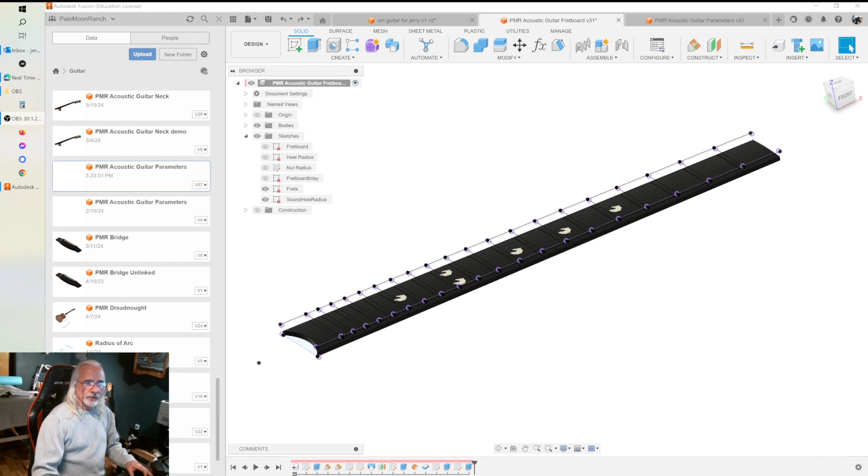So a small problem has been pointed out to me in my fretboard model, where we talk about cutting in our frets with this sketch we created up above. And what I said is that when we do this extrude, we want to do the extent type to object, and that we want that object to be the face of this fretboard.

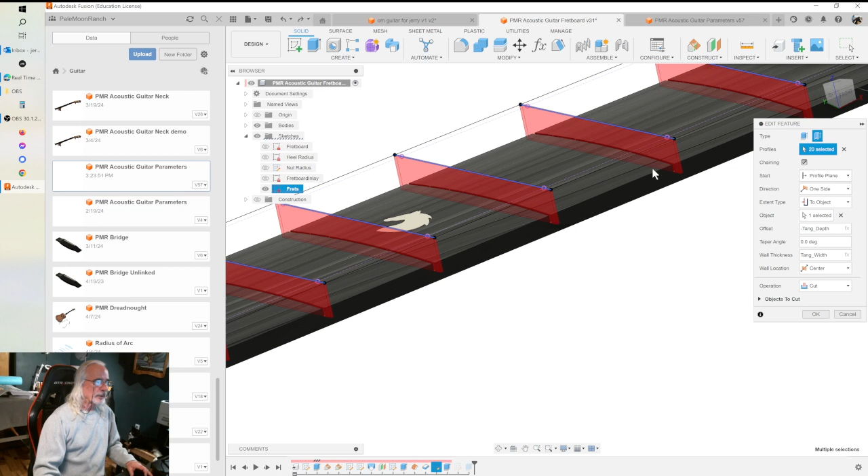Unfortunately, what I forgot about when I recorded the video was, forgive me, I created the model 2 years ago, and I'm just now documenting it. And I forgot that that method only works if you're using hidden tangs. If you try to select the face with these lines extending past the width of the fretboard and then try to extrude that down to get that curved bottom, you get an error like this.

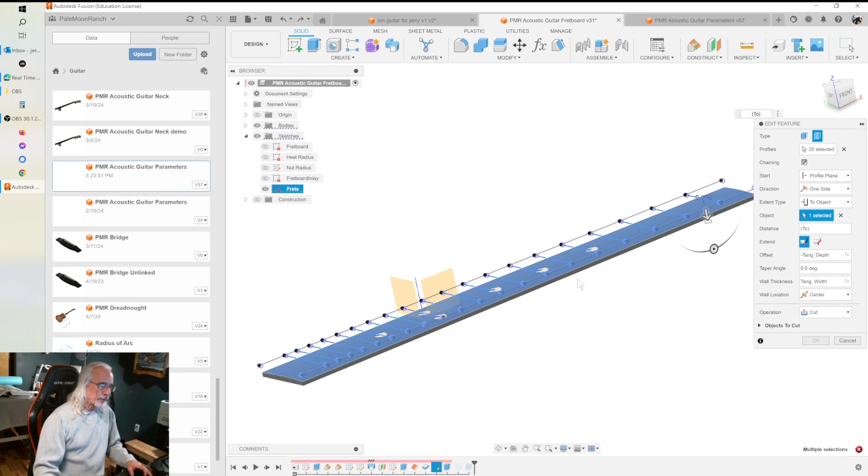So I select that face and I get this: cannot complete extrusion because the extrusion profile falls outside the boundary of the selected body. Unfortunately, I don't know any way around that. So what you have to do instead is, first off, if you don't absolutely care about that curved bottom in the fretboard, instead of selecting this face as the object, you need to select the point on the end of the fretboard right here, like this.

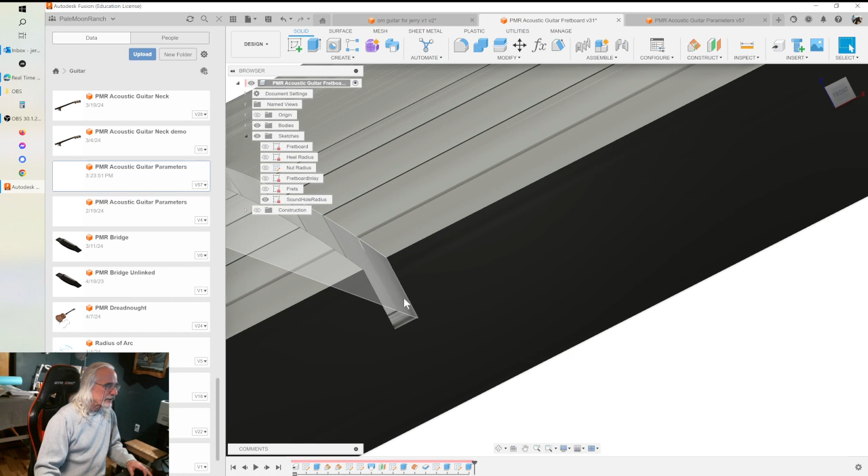So select this point, and then it'll work, but it'll give you a flat bottom. If we say OK, we look inside here and we can see that it's flat on the bottom. And of course, if you're just modeling this for aesthetics, that's not a big deal. We're going to lay our fret in here in a future video, which I haven't recorded yet. I'm going to show you how I make the frets, and they'll sit in here and it'll look nice and pretty. It'll close up the end nice, but there will be a hollow underneath that fret.

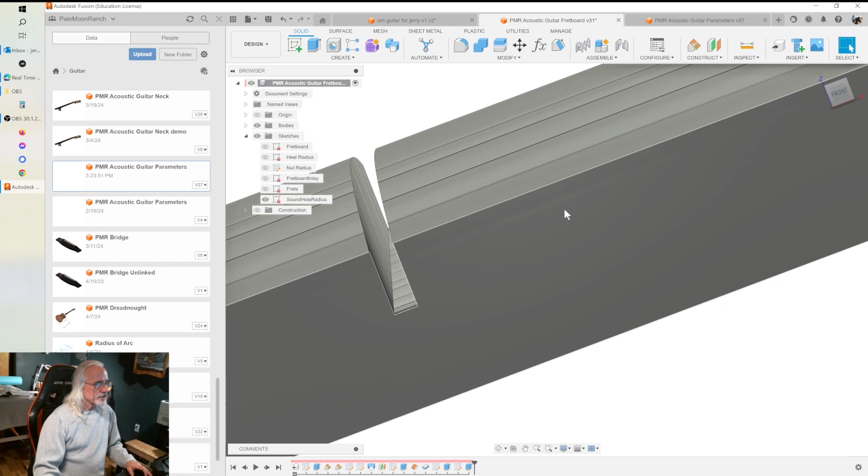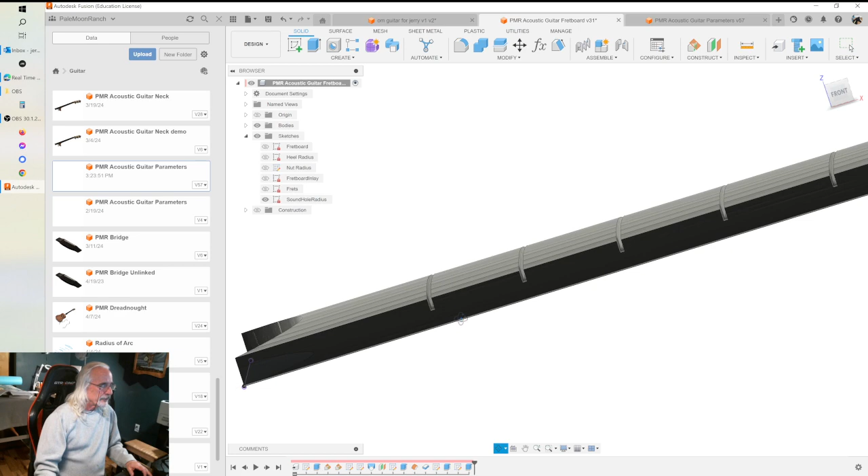If you're going to use this model to actually cut your fretboard, then you need that curved bottom, because you want that fret to sit down on there. You want to be able to put a little CA glue, or however you do it, down in there and glue that fret and press it down on that CA glue. So with that said, if that's what you need, I do have a workaround. It isn't pretty, but I'm going to give it to you, and you can use it or not. It is the only way at this point that I have of doing it.

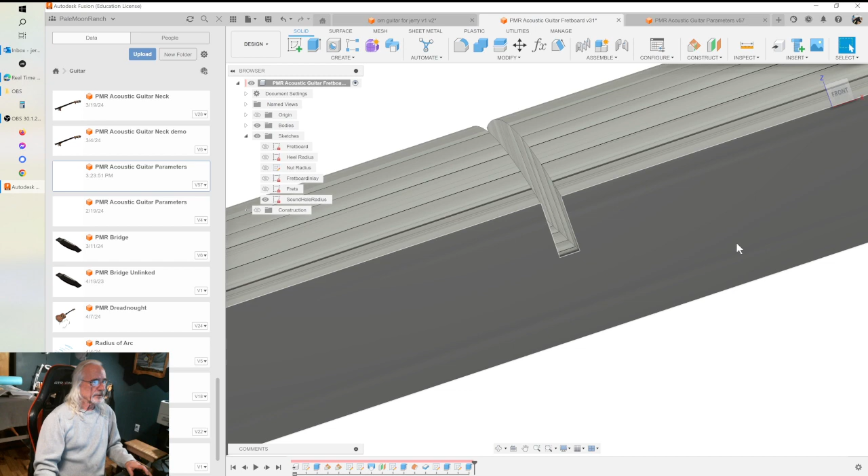I might have another solution I'm working on that has to do with when I make my frets and using the frets that I create to cut these slots, but it doesn't work yet because it's a circular reference. I use this fretboard to design the frets, so I can't bring the frets back into the fretboard to cut these slots. So yeah, fun.

But in the meantime, what we can do is come in here and edit our sketch, find that offset. Where is it? There it is. Instead of using the tang offset, we want to get it just barely inside the fret. I think I explained in the fretboard video that depending on how you create your offsets, this offset would be negative or positive, depending on whether you want hidden frets or not.

In my case, it took a positive number to get it outside for whatever reason. So what I need now is a negative number to bring it inside. And I'm not going to use tang offset anymore. I don't want to bring it in that far. I just want to barely bring it inside. So I'm just going to say negative 0.001, and then I'm going to do the same on the offset on the other side and make that negative. Whatever value you had in here for not hidden, you're going to use the opposite. If it's negative right now, you're going to make it positive. I'm over explaining, I'm sure.

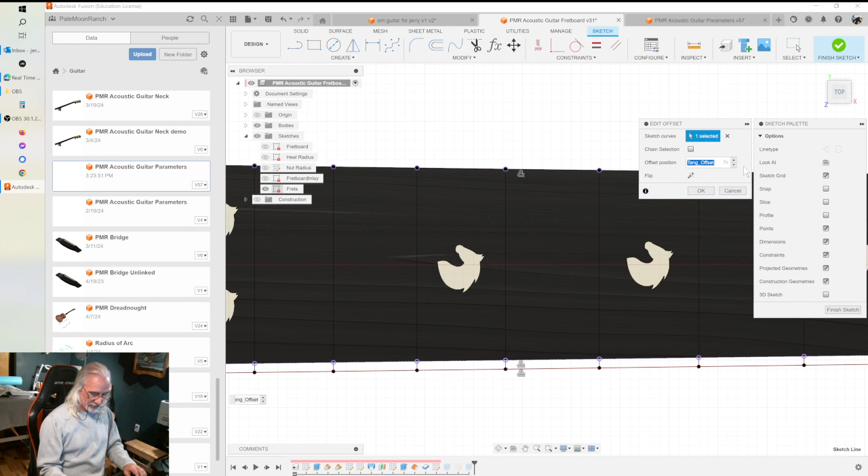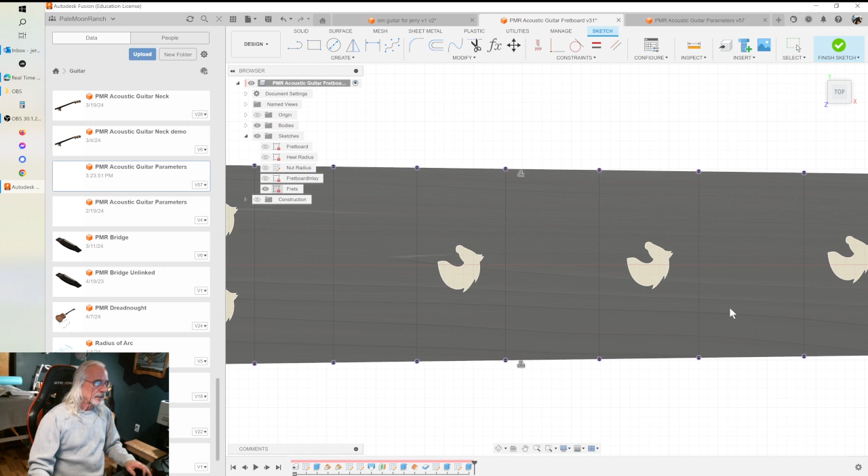Minus 0.001, and now we have these lines just barely inside. And you can't make it 0 for whatever reason. At 0, you'd think it's the same width now, it should work, but it doesn't. So I bring it just inside. If I bring it in 1/1000th of an inch, it works. I'm going to finish that sketch, go to my extrude, delete the object, and select that face as my object. And now you see that worked.

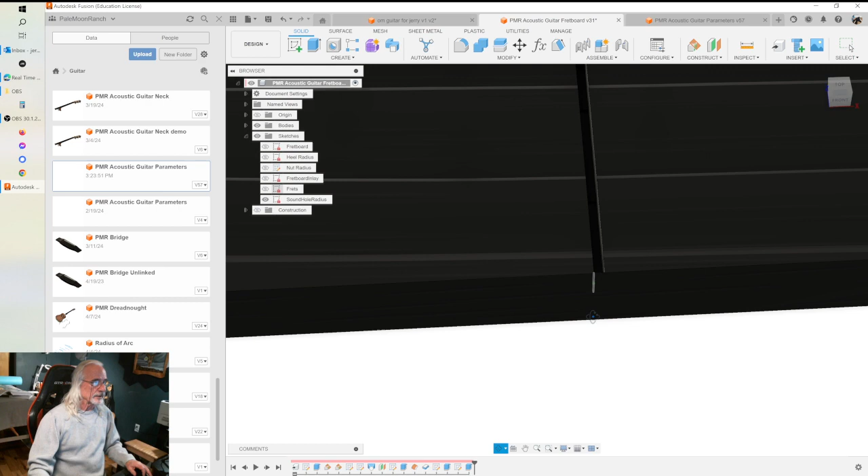Okay, but of course what you'd expect is now we have a very thin wall on the side that we don't want. We need that to go away. And it's pretty easy. You just have to select this face and do an extrude. And unfortunately, you can't do them all at once. You can only do one at a time. I just grab it and pull it out. It doesn't matter how far you go. Pull it out and extrude it and open it up. Flip it around. Select that face again. Extrude it.

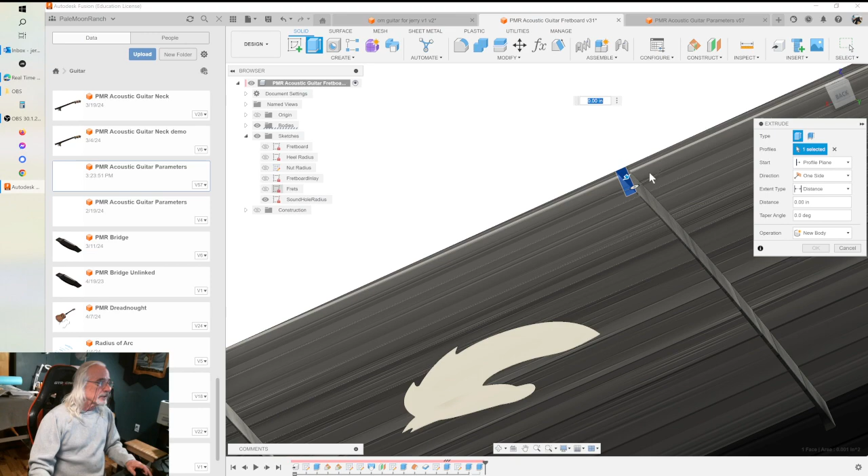And there you go. Now you have that curved bottom. I hope you can see that it's curved down in the bottom of that slot to match your fret. So you're going to have 40 extrudes here. So I just go ahead and do them, and then create a group of those to hide all of that mess. Do a create group, and just close them up. You can give it a name, whatever you want to call it, clean up fret slots or whatever.

Okay, so that's all I've got for you there. I hope that helps. I hope that gets you whatever it is you need.